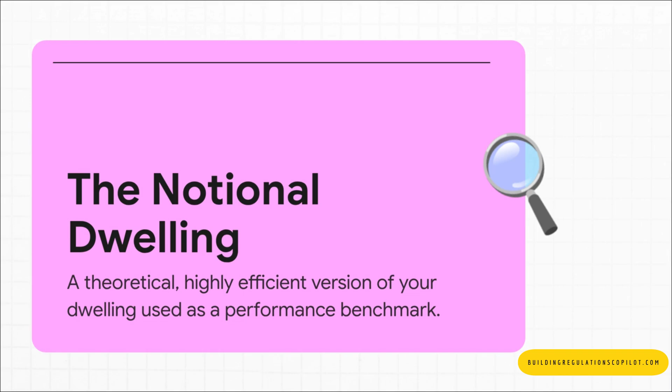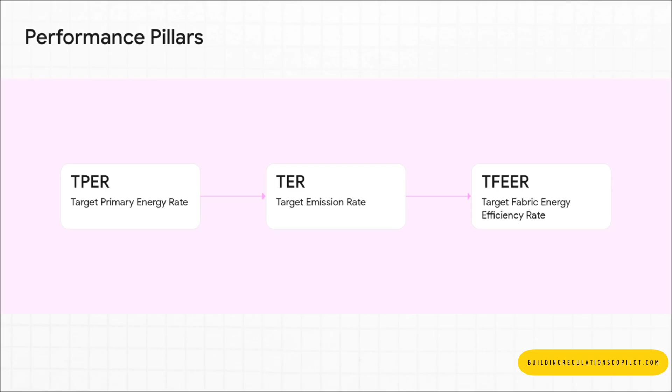And your design has to beat that notional dwelling across these three key battlegrounds. Your building's calculated primary energy rate, its emission rate, and its fabric energy efficiency rate must all be lower than the target set by that notional home. You have to clear every single one of these hurdles to pass. No exceptions. So let's break that down, because this is where your design strategy really comes into play.

The TPER looks at the total energy your home uses, and the TER, that one focuses on carbon emissions. Now notice how they're both influenced by your building's fabric and your choice of fuel. A gas boiler versus a heat pump, for instance.

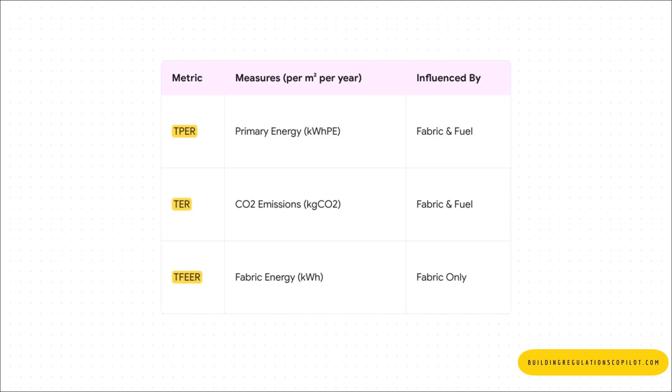But then look at the TFEER, the Target Fabric Energy Efficiency Rate. This one is absolutely crucial. It is a pure test of your building's envelope, the walls, the roof, the windows, the airtightness, and it has nothing to do with the heating system. It proves your design is fundamentally efficient from the ground up.

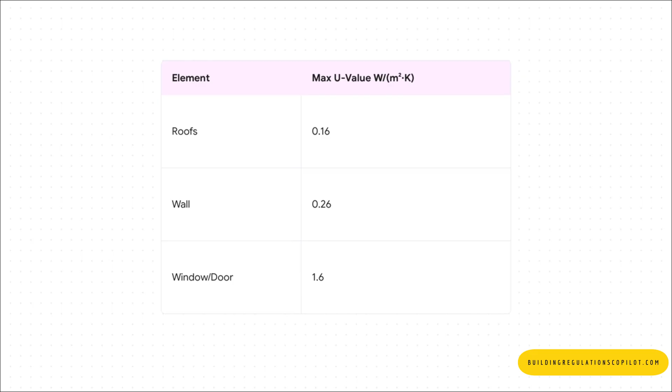Right, so this fabric-first approach is clearly fundamental to the whole thing. So let's dive into the practical side of compliance, starting with the very shell of the building itself. The document sets out these absolute minimums, what it calls limiting U values, for the different parts of the building. You can see the main ones here. So, for example, a new wall absolutely cannot have a U value any worse than 0.26. Think of these as the legal backstop, the absolute floor for performance.

But, and this is probably the single most important point to take away, just meeting these minimums is not going to get you a pass. Not even close. The document spells it out right here in black and white. To beat that TFEE, the pure fabric target, your design is going to have to be significantly better than these backstop values.

And this slide just perfectly illustrates that gap. On the left, you've got the legal minimum U value for a wall, 0.26. But look over on the right. That's the U value your competitor, the notional dwelling, is built to, a much tougher 0.18. You see the same story for roofs and windows.

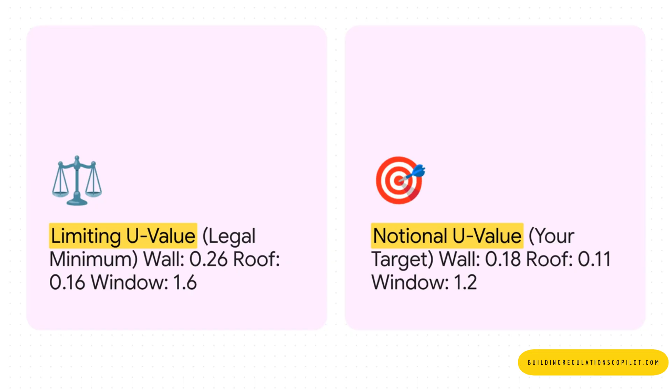Your design has to somehow bridge that performance gap if you want to comply. Okay, now for air tightness. This number, 8.0, is the absolute legal maximum for air leakage. But just like with the U values, your real target is way tougher. The notional dwelling is built to a much tighter standard of 5.0.

And here's the critical bit. You can't just assume you've hit the target. An air pressure test is now mandatory on every single new home to prove how well you've done. So how do you actually hit those really tough fabric targets? Well, it's not just about specifying thicker insulation, it is all in the detailing.

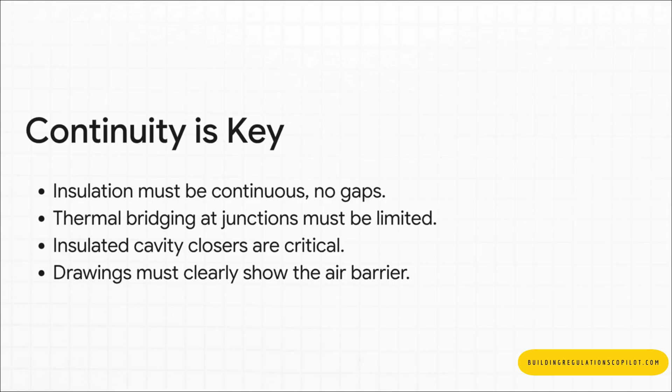The guidance hammers home again and again the need for continuous insulation with absolutely no gaps, designing out those cold spots, thermal bridges, at junctions, and clearly identifying your air barrier on the drawings. One sloppy detail can completely undermine the performance of the entire design.

For any new or fully replaced wet heating system, it has to be designed so it can operate effectively at a maximum flow temperature of 55 degrees Celsius. This is a huge shift, pushing us all towards low-temperature systems, which makes technologies like heat pumps way more effective and even improves the efficiency of modern boilers.

And it is not just about flow temperature. The regulations demand a much smarter approach to services all around. Systems have to be efficient and, critically, sized correctly, so no more massively oversized boilers. Effective controls are now mandatory, right down to the room level.

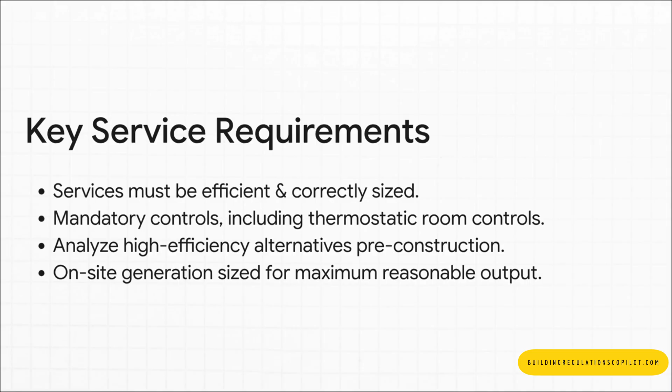And get this, before you even put a spade in the ground, you have to prove you've analyzed high-efficiency alternatives like heat pumps. Plus, if you do install renewables like solar PV, they have to be sized and set up to deliver their maximum reasonable output.

Okay, so you've designed a high-performance fabric and you've specified efficient services. Now you've reached the final step, proving it all to the building control body. And this is where your documentation and your evidence become absolutely critical. And the cornerstone of all your evidence is this, the BREL report.

This is the official summary that comes out of your SAP software, and it formally declares to building control whether your project passes those three key targets, the TPER, the TER, and that all-important TFEER. And you don't just do this once. You have to submit a BREL report at the design stage before any work begins to show your design will comply. Then, within 5 days of completing the build, you must submit an as-built BREL report.

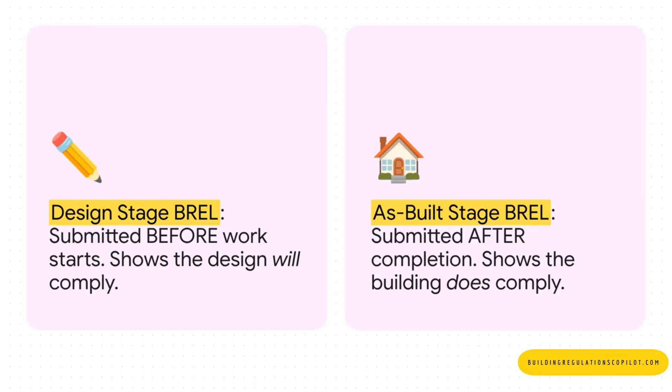This final version is the crucial one. It includes the real results from your air pressure test and documents any changes that happen on site to prove the building does comply in reality. And you can no longer just say you've done it right. For the very first time, the regulations demand mandatory photographic evidence of all the key construction stages.

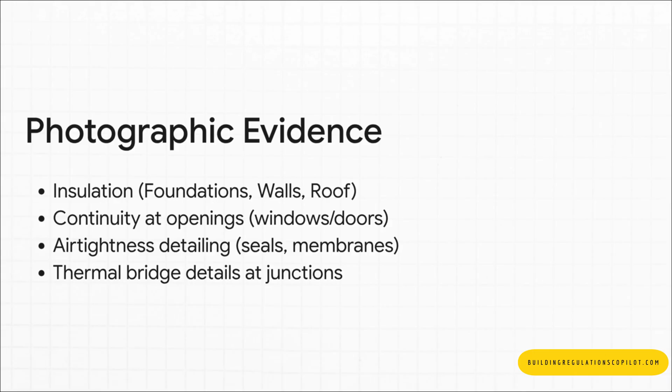You have to take geotagged, dated photos showing the quality of the insulation, the detailing around your windows, and the work at critical junctions before it all gets covered up. This evidence trail is designed to finally close that gap between how a building performs on paper and how it performs in the real world.

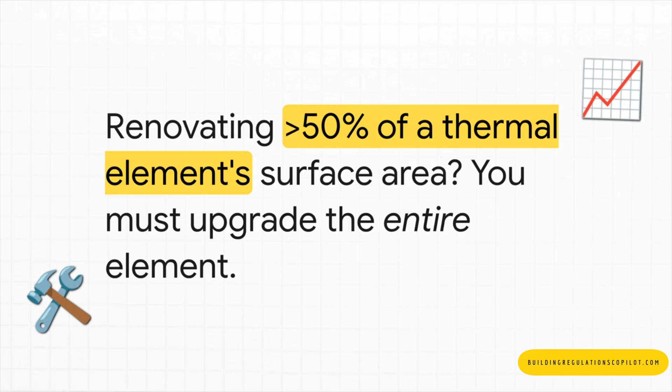And just a quick but really important note for those of you working on existing buildings. These same principles are now applying to major renovations. The key thing to remember is the 50% rule. If you're working on more than half the surface area of, say, a wall or a roof, you are now required to upgrade the insulation of the entire element to a modern standard, as long as it's feasible.

So the crucial point is this. Approved Document L1 represents a massive step change. It really demands a holistic, evidence-based approach to both design and construction. So the question we all really need to be asking ourselves is, are our current practices actually ready to deliver on this new standard?